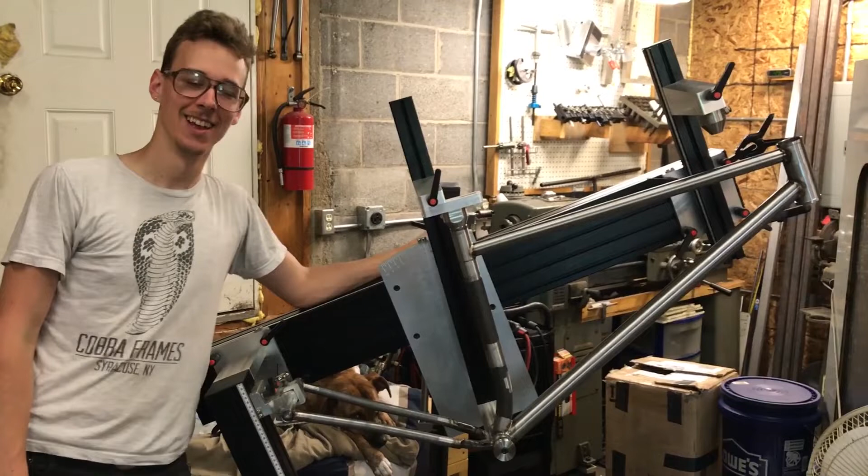My son is becoming a man. This frame is coming close to being done. Look at all the work that we have and how far it's come. I think it's exciting. In this video, we're gonna design and then cut, then bend and miter the seat stays so they're ready for welding. Let's get into it.

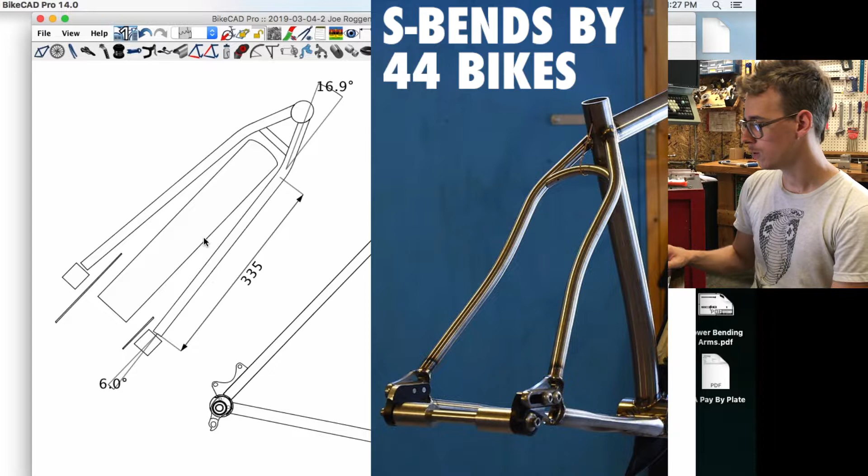That's popular these days, and there's nothing wrong with that, but I've always kind of preferred the look of the single bend rear end anyway. It's more of like a 80s, 90s mountain bike kind of look, and I think it looks good and simple, and that's just kind of what I feel like doing. So with my bender, you could pretty easily do S-bends, and I have a YouTube video about doing S-bends, but in this case I think I just want to do single bends.

And so I have, in the wheel dialog box, the diameter of the wheel and width of the tire, and so that gives me the tire here modeled up, and then I just kind of do the bends around that. In this one I do the number of curves, I do 1, I do the radius and how far I want it to kick off of the center line of the tube, where along the length of the tube I want that. You can do this as a ratio or in millimeters, doesn't really matter.

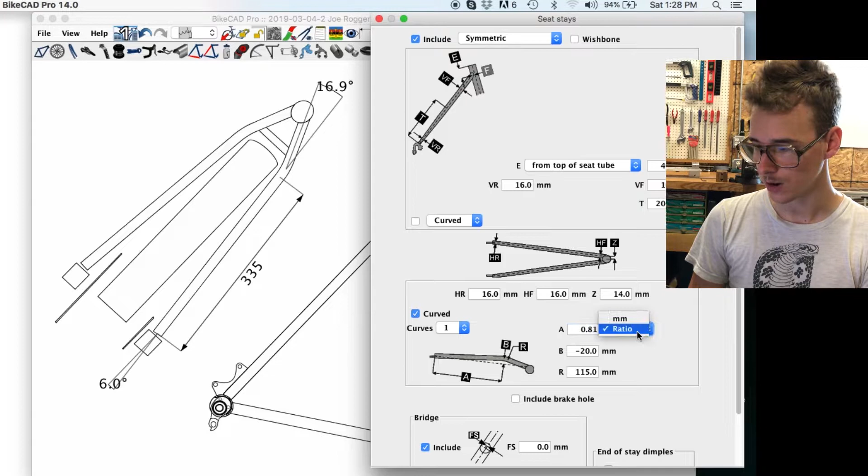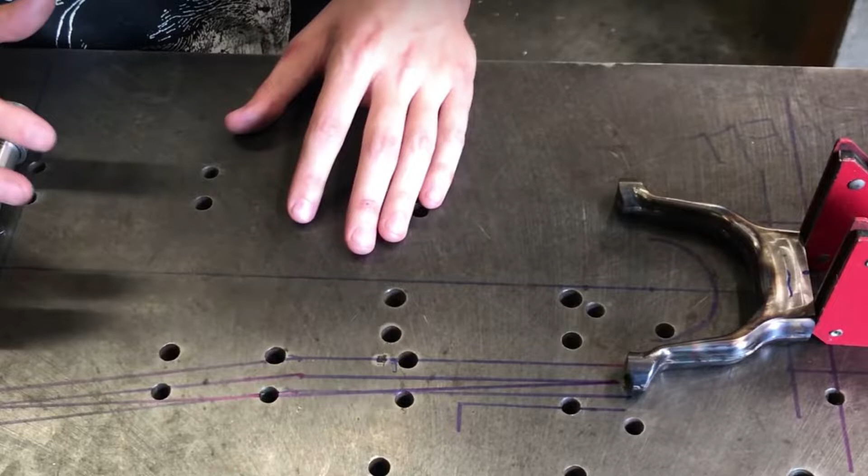And then I use the dimensions dialog box to pull up certain dimensions, and these ones here show me the length from this point on the end of the tube to where the point of tangency is for the start of the bend, the degrees of bend, and then this here also shows me the miter angle against the dropouts. And so that's the information roughly that I need to do these. Whereas in the last video I drew it up with a Sharpie on my table, in this case I'm just using BikeCAD. So different ways to skin a cat.

So we'll go chop the tube and start cutting and bending the tubes. So this is going to become our seat stays. This is 5/8 of an inch or 16 millimeter 4130 chromoly tubing. It's straight gauge tubing. So this isn't designed specifically for bikes. This is just chromoly tubing. I need to cut it roughly to length, and there's different ways to do that. So I could do a measurement in BikeCAD that would show me roughly the length I'm looking for.

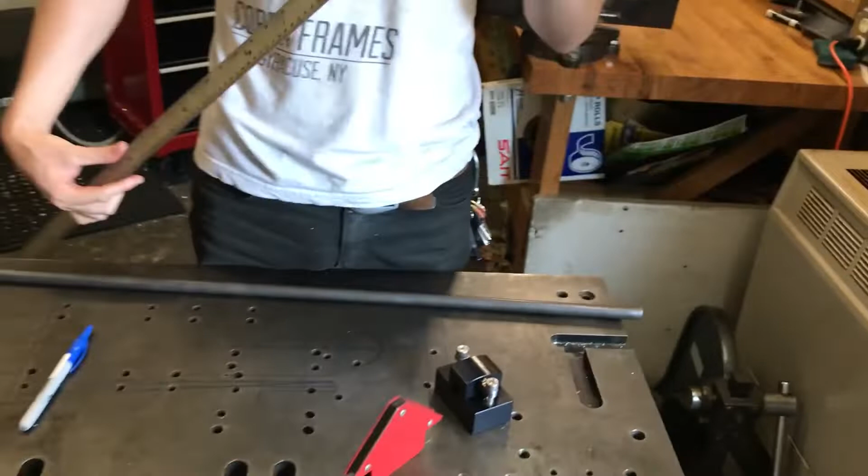Another way to do that is to just walk over here to the frame fixture, and I can say, yep, I want it to be at least this long for a rough cut. That's one way to do it. So I can measure this, or you can just put the ruler on the frame fixture. Pretty obvious. And this is what I had worked out before, was like 480, 485, somewhere in there. So I'll just cut it a little bit long to be safe. Scribble this one out. So I'm going to cut 2 pieces to that length.

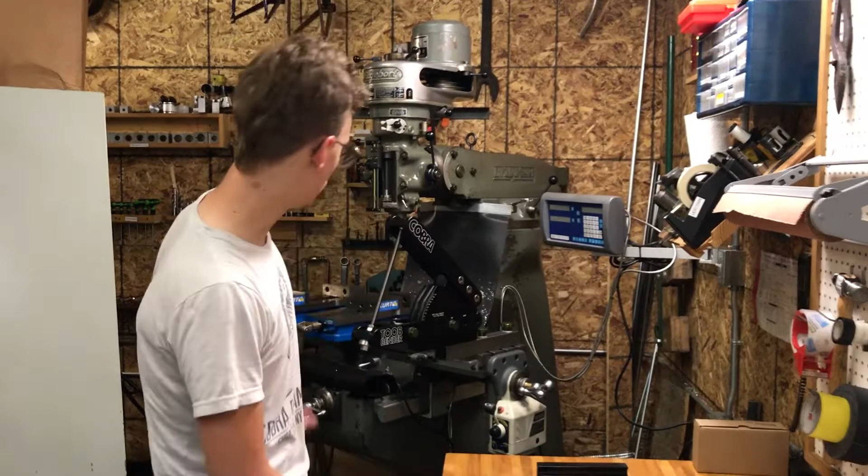So we're about ready to bend these heckin' tubes, and we need to know the degree of bend, and we need to know where along the tube do we do the bend. And so if we look at our beautiful Cobra Frames tube bender, we're going to slide the tubes in a certain amount, and the point of tangency is like right here, where the straight line of the tubes meet the arc of the bending die.

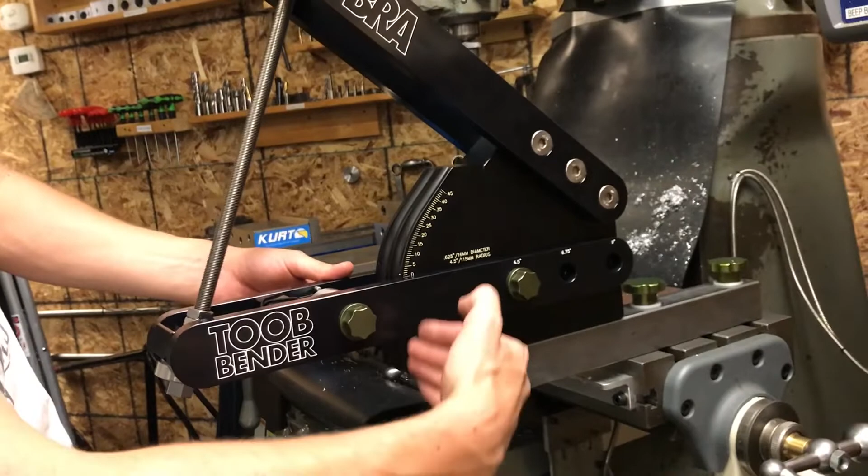And so you can figure out that point of tangency from BikeCAD, and that was my number that I had on screen earlier, and I'm just going to add a little bit because that was from the dropout to the point of tangency, and the tubes are still rough cut, so there's a little bit of extra length on either end. So I added just a little bit of length to that, and now I know how far to stick my tubes in. So I have it marked. The tubes go into this mark.

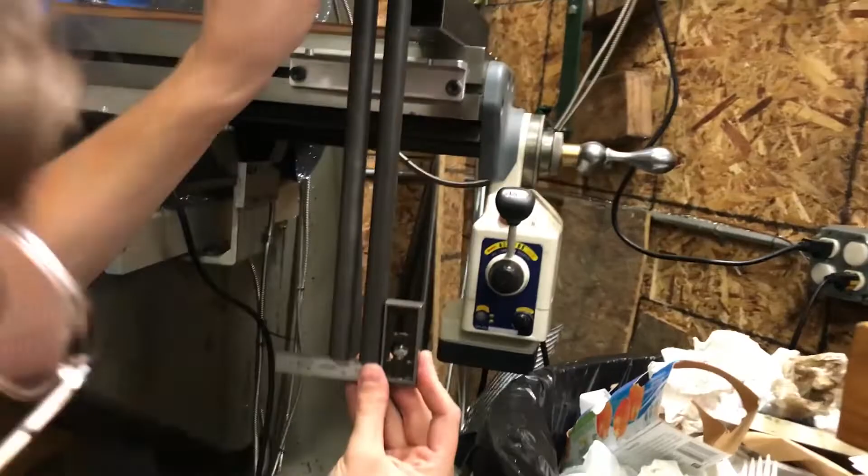I like using this square to square up the ends of the tubes so that they're really the same length projecting out of the tool. So by using this square, I can just really match them up. So the bends, because they're bending together and they're from the same material, I know they're going to get the same degree of bend almost exactly, like so close. It would be nearly impossible to measure the difference in the degree of bend between them, I think. But when you line up the ends, then they start the bend in the same place, and so it's pretty repeatable at that point.

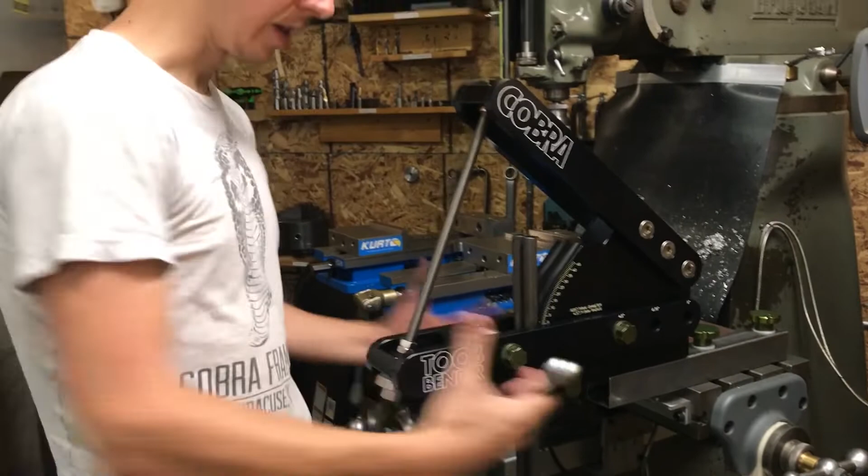So I'm tightening the clamp that holds the tubes. Then I drop in, this is called a follow bar. This cradles the back side of the tube, and if you followed the series, you've seen this a couple times. I'm just going to put a little bit of preload tension on this screw here, and that just keeps it all compressed. And now I'm going to drive the bend.

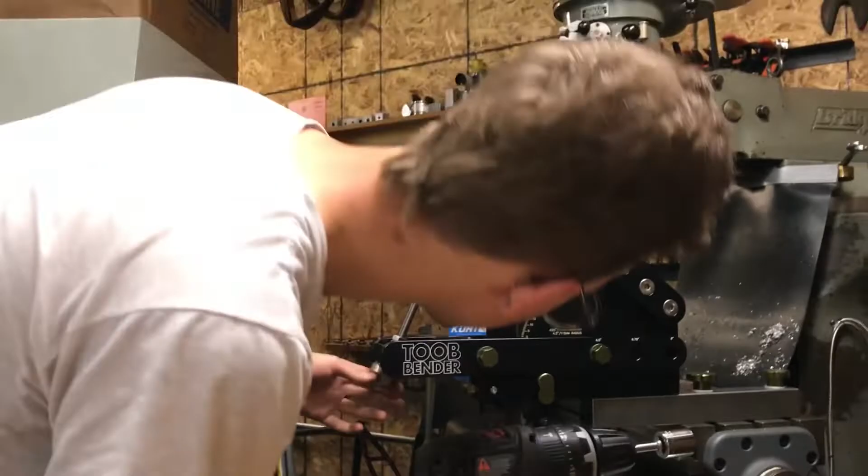So I want to have 17 degrees of bend, and if I just bring this to the 17 degree mark and then release the pressure, it'll spring back a bunch, right? So I want to go over 17 degrees, and I don't know exactly what to do, so I'm going to go to like 25 for starters. We'll see what that looks like. Let's do it.

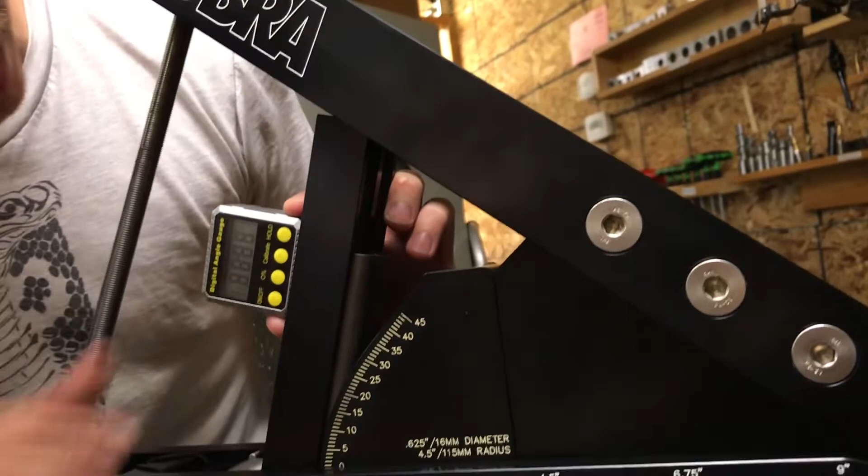So there's all different ways to measure the degree of bend. One of the cool things about this bender is that because the tubes are straight here and then the bend is up here, you can use a level. And so I get this follow bar, so it's pushing against this bent section, and then I can read the angle off of this scale. So when I turn it on, if this is vertical, which it is, then I subtract 90 minus 73, and that gives me 17, which is actually what I'm shooting for.

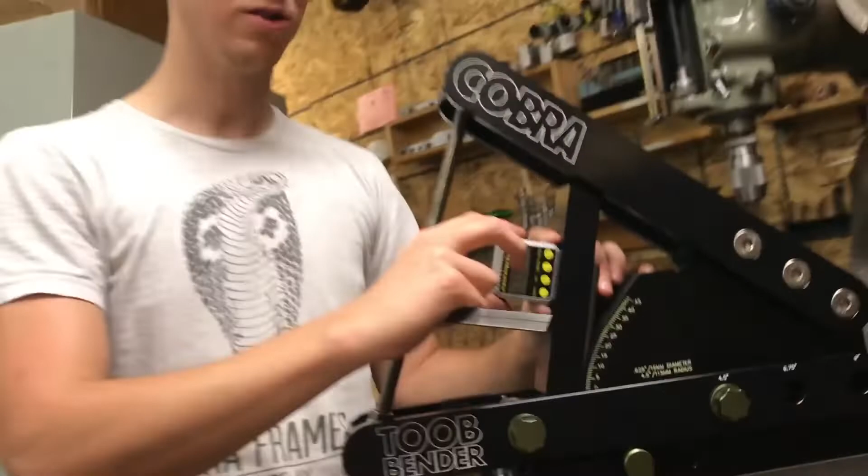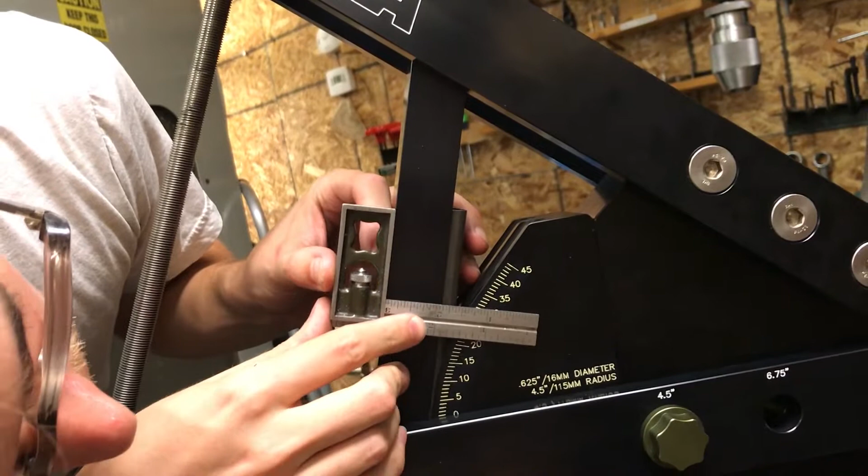And I figured out another way to measure the angle while it's in here, which is pretty nifty, and that's to use a little square like this. So I get this follow bar, so it can't be down here. It needs to be parallel with the tubes. I use the square to sort of project this edge, and then a perpendicular line, which is this. And now I look for when, up here it's not parallel with my degree marks, and down here in the other direction it's not parallel, but at some point it'll become parallel. So it's a little bit sensitive, but you can read the angle like this.

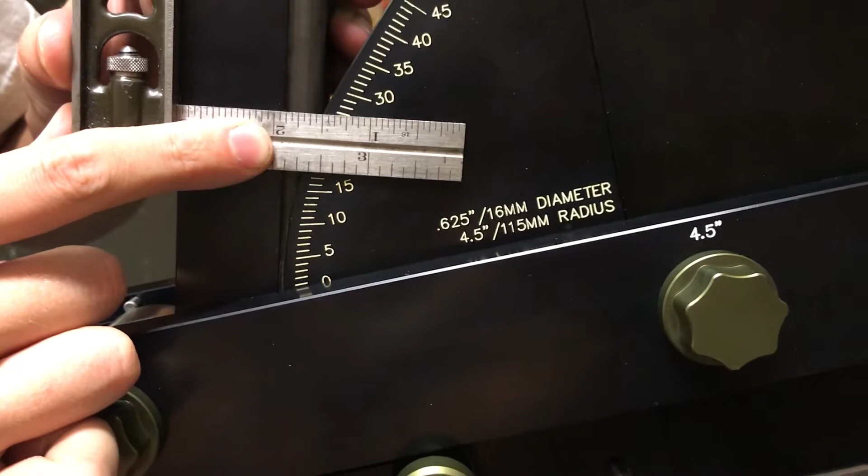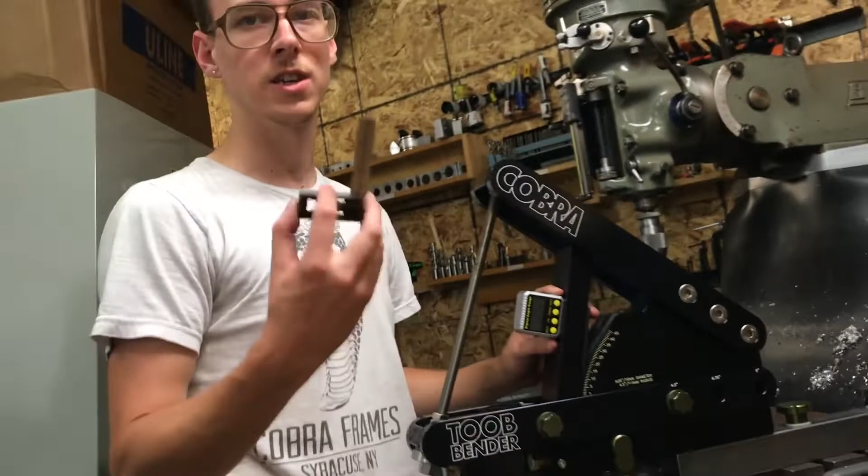So it looks like, according to this method, I would say that I'm at 16 or 17 degrees. It maybe looks a little bit more like 16. And when I use this guy, we had measured, that's more like 17, but you can see you can get pretty close measuring this way. So if you didn't have one of these around, it's just another option. So I'm going to say that we bent it where we needed to bend it. I'm feeling pretty good about that number, and I just take them out of the bender. Those look real nice.

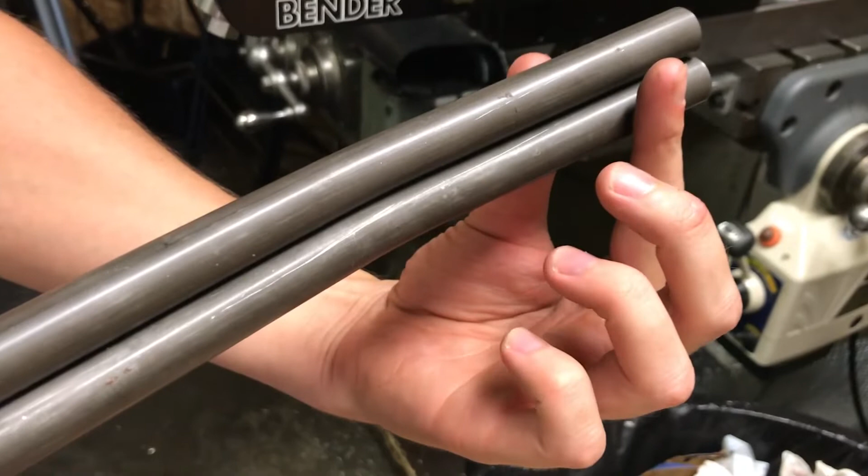So at this wall thickness, 28 thousandths of an inch, this stuff is kind of fussy to bend. If you don't have nice tight-fitting dies, this stuff will ripple on the inside, and sometimes worse. But when it's supported nice in dies like this that are hard and smooth with exactly the right geometry, it just cradles the tube, and it allows you to get a nice smooth bend. When I used to do this stuff on not ideal benders, it was very difficult to get smooth bends, and it was also difficult to get the bends placed exactly where I wanted, get the tubes to match each other.

Everything about it was really difficult. Also, getting it bent to a particular degree of bend, very tricky, and this makes all those steps a lot easier. Being able to design on the computer and then walk over to your tool and quickly make the bends that you want to a known specification, and then move on, it's amazing. I used to not have any of this capability, and it gets me really excited to have this at my fingertips.

So this is a good spot for bending. It's not a good spot for when I need to use the mill. Let's get this thing out of here. We're going to start mitering the seat stays. First, I want to do the dropout end where the seat stay meets the dropout, and that comes in at, I think, a 6-degree angle.

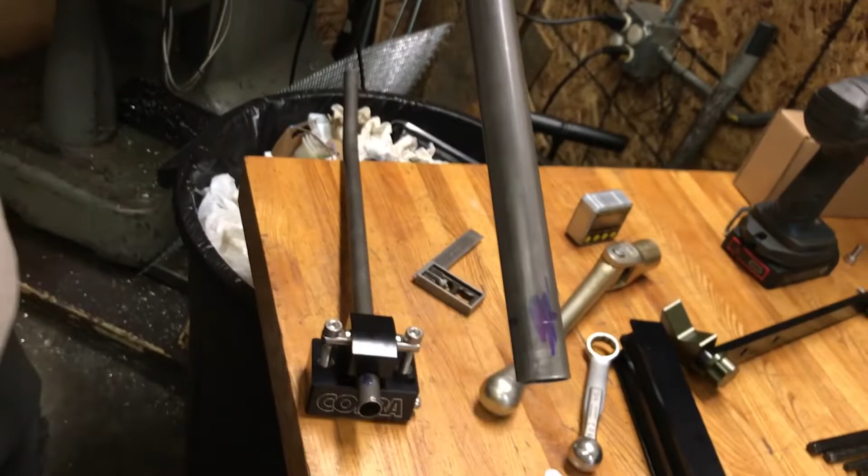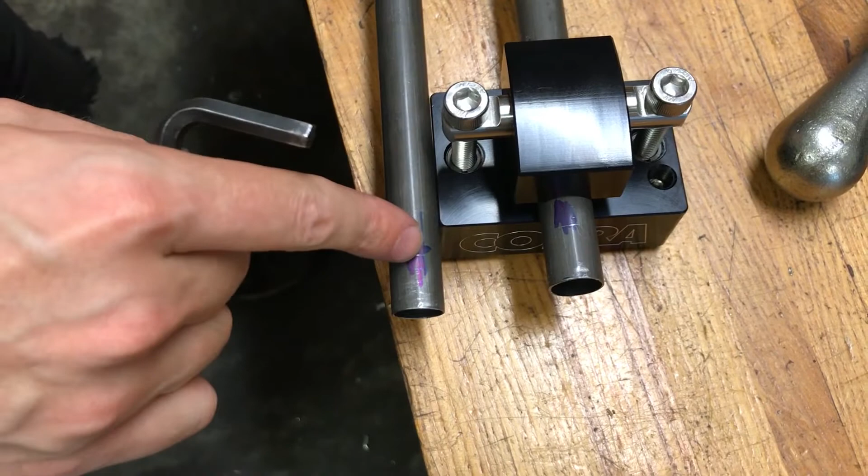And so remember, when I had them on the bender, I flushed up the ends of them with this square. That's helpful now. What I did is I used the Sharpie and then my calipers, and I scribed a line on either one of them. And that way I can cut up to that line when I'm mitering them, and it should make this distance from this line to the point of tangency of the bend the same on both of them, which is great.

And in order to hold them to do that cut, we're going to use the Miter Buddy. This is a tool I released a while ago. I haven't used it yet in this build series. There's some other videos on this channel outlining it. The Miter Buddy is exactly like the Miter Daddy, which we've been using on main tubes. It's very similar in a lot of ways, but this was designed specifically for this application. This holds the dropout end of seat stays, chain stays, and fork blades.

And what this really excels at is, right here we have a straight gauge tube. This is not as hard to hold on to, but a lot of times when you're using bike-specific tubing, it's got a taper as it approaches the dropout. And that is actually very difficult. How do you hold the tube on its taper? It's relatively thin wall stuff. If you just clamp it between parallel jaw faces, you're going to leave crease lines.

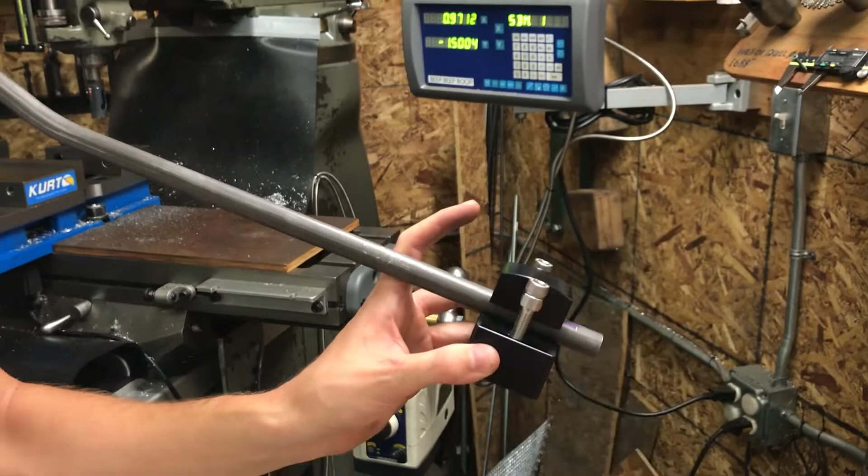If you try and hold it in a normal round tube block, over its length here, it's tapering. So if you clamp it with traditional tube blocks, it's going to pinch on the large side and it's not going to be supported on the small side. And the beauty of this, which is also common to the Miter Daddy, is that this top clamp block can pivot. And so if the tube is coming to a point, this top one just pivots. It distributes the clamping load evenly across the whole thing. You get a nice solid hold. It's also 3 inches wide with parallel faces, and so it goes right in our milling machine vise real easy.

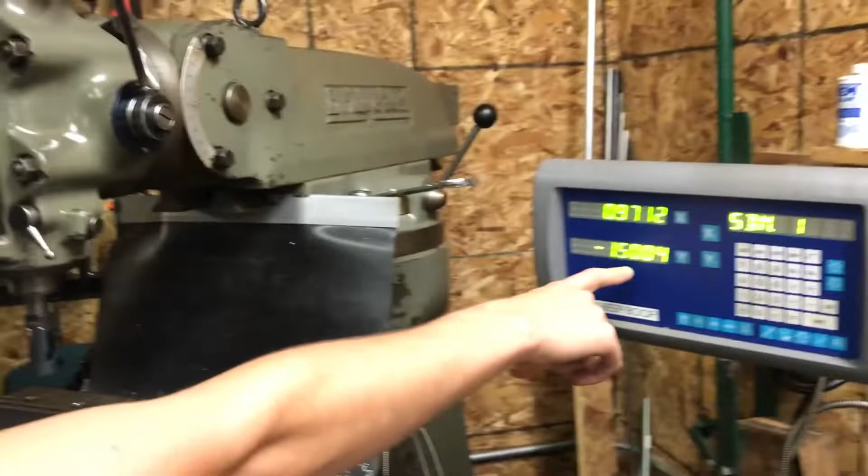So just a second ago off camera, I touched off on this fixed jaw, and then I moved back 1.5 inches. So 1.5 inches puts you right on the center line of the tube. So I just set it in the vise here, tighten up the handle. So now I need to set the angle of the cut. I need to have the tube sticking out of the holder just enough. And then the last thing that I need to do is, because there's this bend in here, I need to phase the tube. So I don't want the bend to be tipped back a little bit.

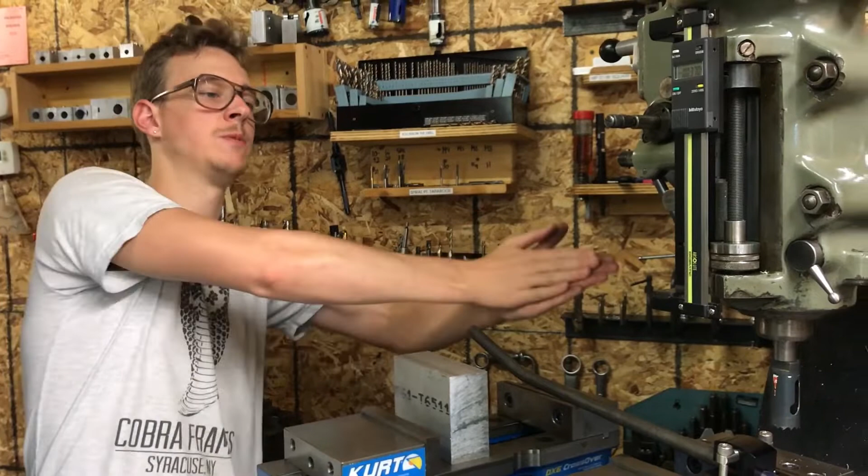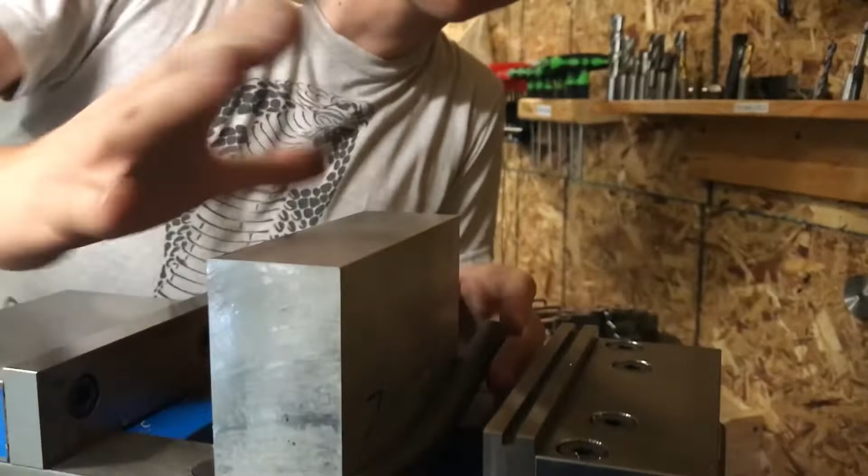And now I do the miter, and I want them to be in line with each other. And so the easiest way that I can think of to do that in this case is, it doesn't matter what the angle of this is yet, so I'm just going to swing it low. And now I have this block that's relatively square, and I can push the face of the block against the tube. I know it's dark back here. I can loosen up the clamp bolts here on the Miter Buddy, and I can twist the tube until it sits flat against this face here.

And when it makes nice broad contact here, then I can tighten these up, and I know that the tube is in plane with this. On the milling machine, you would call this the XZ plane, but you know, with this sort of vertical plane.

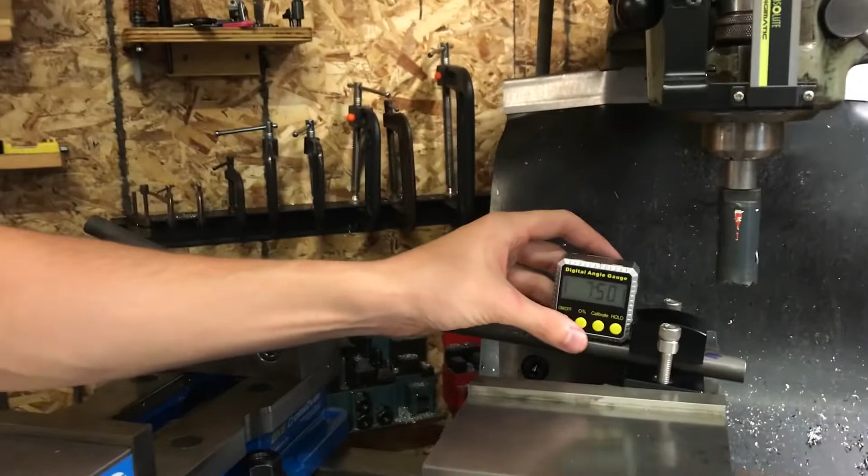So I'm going to set the angle of cut, and my favorite way to do that is with the digital angle gauge. And in this particular setup, usually it doesn't do this so much, but it just keeps wanting to fall off for me today. I don't know if these magnets have gotten weaker or something, but there's a simple solution to that, which is that the tube is straight all the way until here, and you can just put this thing upside down.

And what's great about that is that it actually knows that it's upside down, and it knows that you're probably right side up, and so it displays the digits so that you can still read them. And so this works fine in this case, and I can set the angle this way.

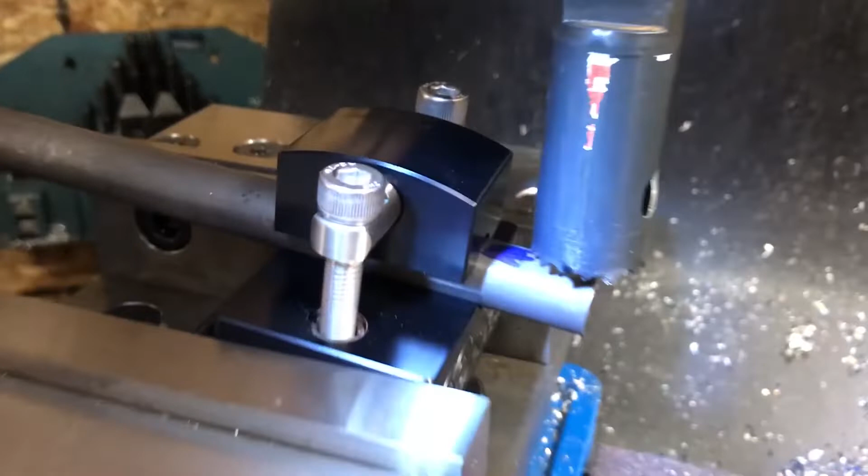So I'm gonna come up to my line here. It's kind of hard to see the line, so I got a flashlight, and I'm gonna turn the spindle on. I'm gonna slowly feed down. And I'm actually going to feed over until I approach my line. You don't really want to cut side to side, but I'm just skimming the top. I think it's okay. I like where it's sitting, and I'm going to make the cut now.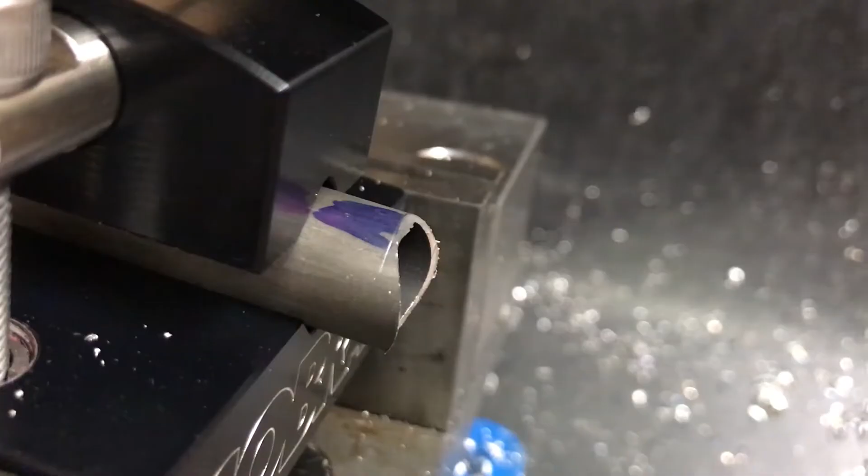One of the coolest things about this is that you can match the angle: as long as you don't release the vise pressure on this, then the angle will stay the same. And so I'm just gonna loosen these, pull the tube out, put in the next tube, phase it again, and then I can make another cut.

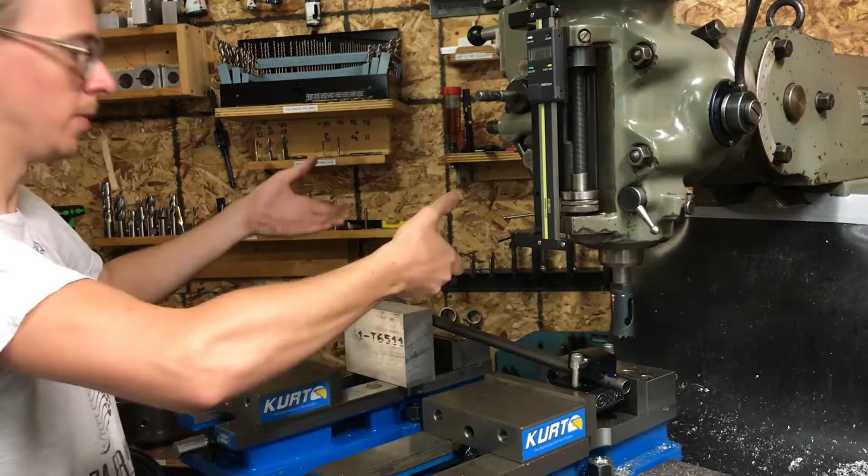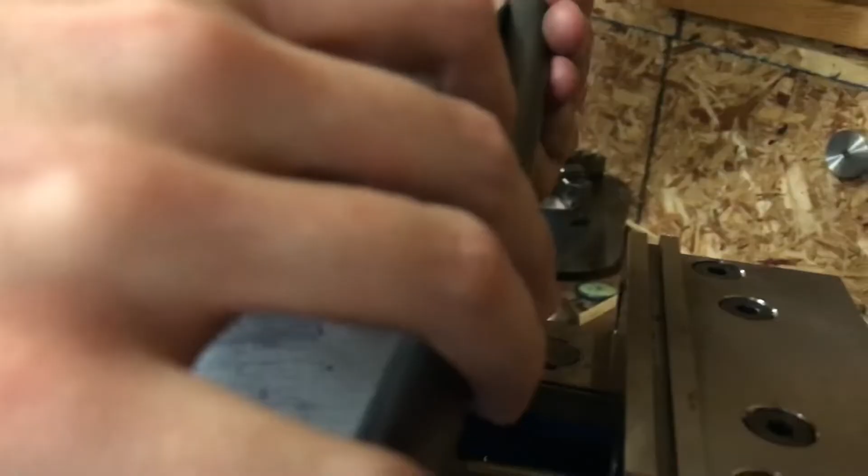So I want to get about the right amount of stick out. I don't want it way out here, and I don't want it choked up where I can't reach it. This is my squaring block. I see now, last time I did this was before I set the angle, so it's sitting up a little bit higher. I don't have as good a contact, but I don't want to change this angle. I'm actually going to lift the block up. These will be a good way to jack this block up a little bit without changing its squareness. I just rotate it until it makes nice broad contact.

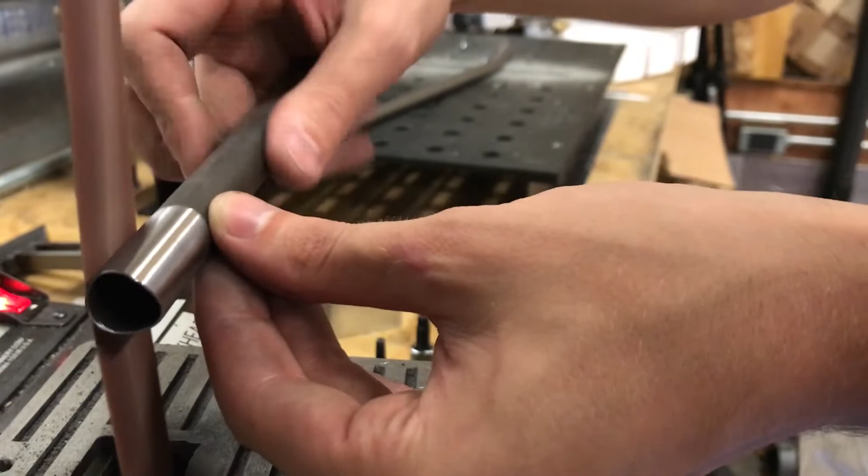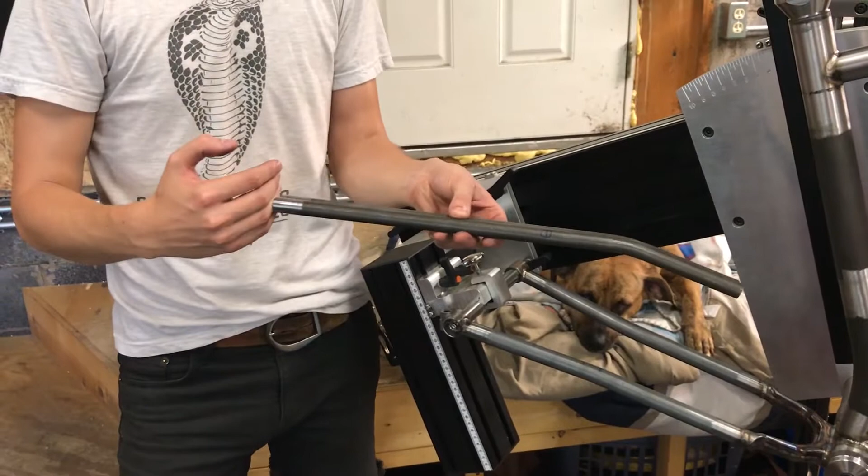So now we have the matched pair. They're roughly the same length. The miters are exactly the same length from the point of tangency, exactly the same angle, and the bends are exactly the same. And so we can set them in here, but of course they're not ready to sit in the frame because there's interference. They're too long. We haven't mitered the other ends, so we can't really test the fit that well yet.

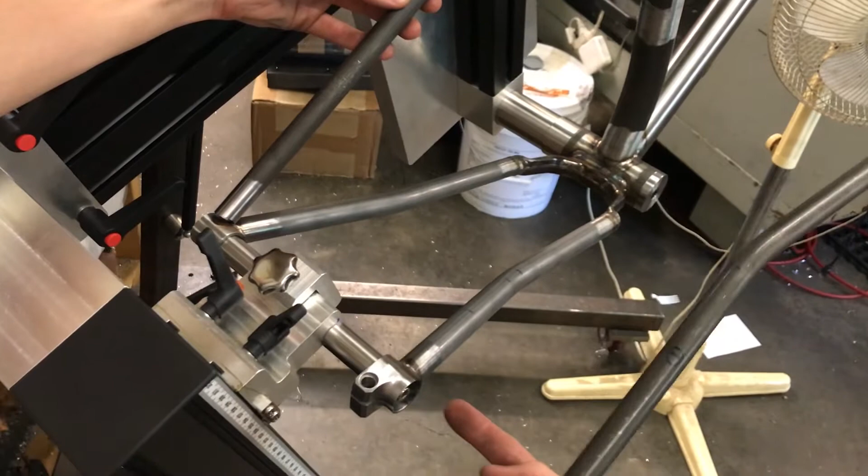They're mitered so that the center line of the tube intersects the center of this dummy axle, like the center of the dropouts. And so to sit at the angle that they need to this way in the frame, there's going to be interference. I'm going to have to grind part of this corner out here where it sits against the chainstay and the weld bead on the chainstay. That's not a big deal, but I haven't done that yet. So you don't see the fit up yet until we do that other clearancing.

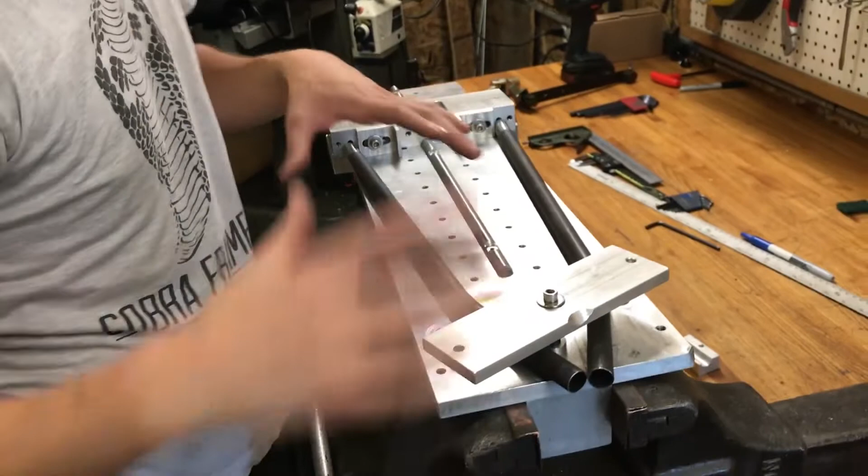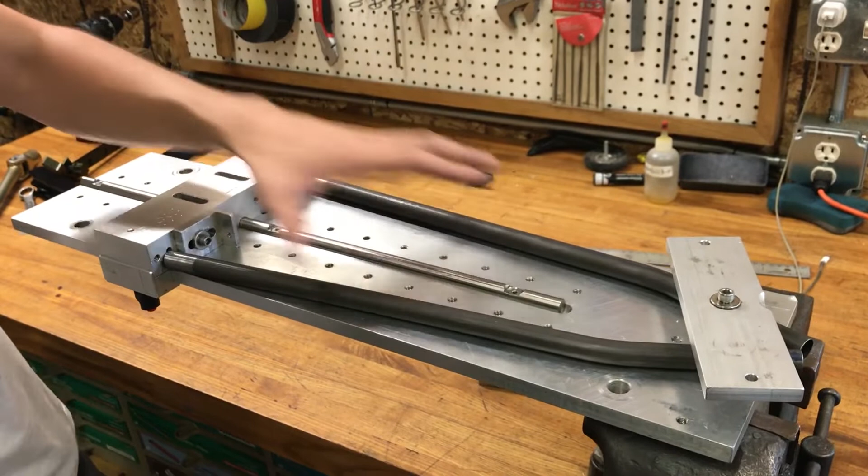So in order to do the seat stay miter where the seat stays intersect the seat tube, I'm gonna use my seat stay mitering fixture. I built this years ago. It was one of the first tools that I built for bike frame building after I got this Bridgeport milling machine. And it was a fun learning project. I learned a lot from making this. It's not perfect, but it's gotten me through projects every time I've gone to use it. And so I've been lazy about building something better, and I never bought anything nicer.

And so what it allows you to do is, here on the rear I have markings for different widths of hubs. I use that as a reference along with a millimeter scale, and I can get these so that they're centered, and this here is like the center line of the fixture.

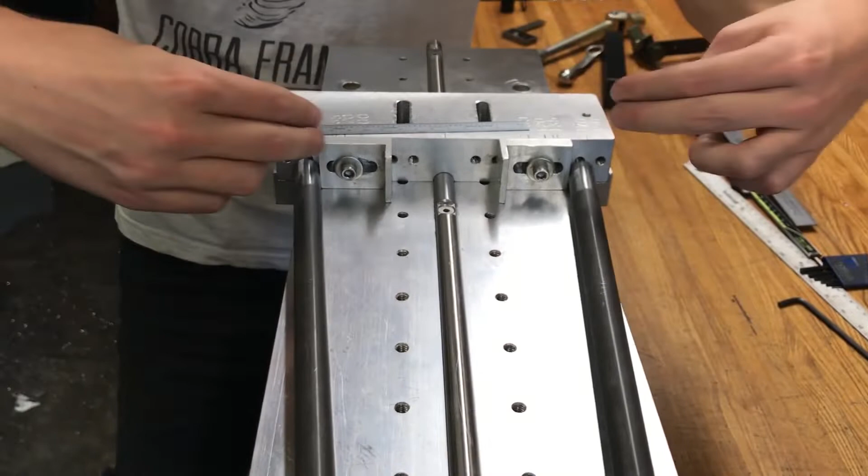So I'll center these little things, and that's just so I can butt up the ends of the tubes, and then the tubes sit against this edge. So really, when you have a cutout like this that's a half round shape, and you're using an end stop like this, you'd really like to have your end stop fit that half round shape at the right height.

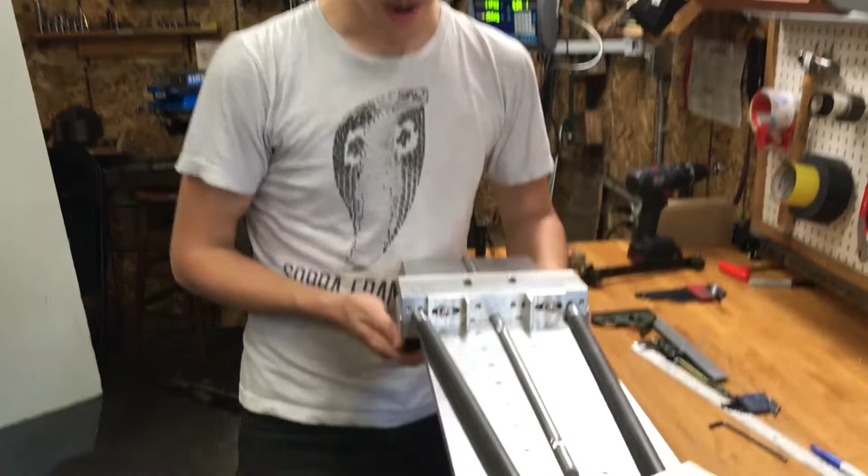It becomes a lot more complicated because every different kind of dropout has a different sort of fit up. So I never bothered making all those, but ideally that's how you do it. This usually gets me pretty close, and it's usually been fine. So anyhow, this whole thing here slides, it's like on a sled or whatever, and so I can slide this part forward and backward when I loosen these clamps on the bottom.

And because of this central rail, it's pretty square. It can't really wiggle more than, I don't know, 5 or so thousandths. I don't think that's quite 10 thousandths of an inch. But anyway, it's not a whole lot. And so that allows you, if you had really short seat stays, you would slide it forward. If you had really long ones, you'd slide it back. And so I want to get to where it makes sense.

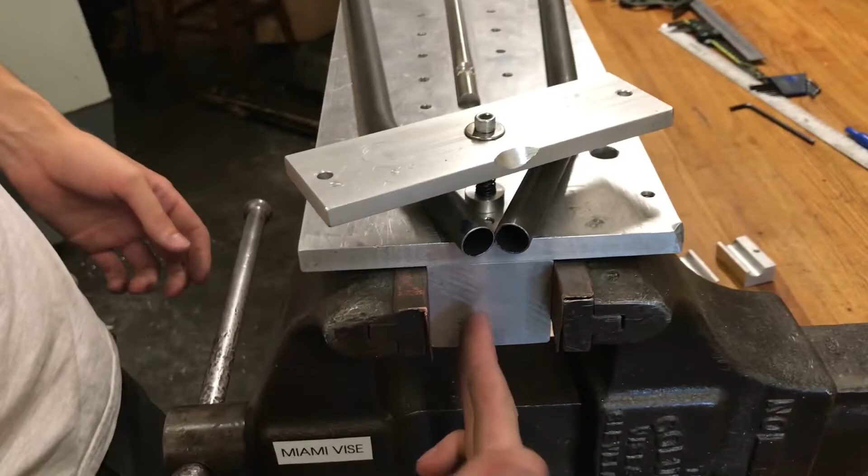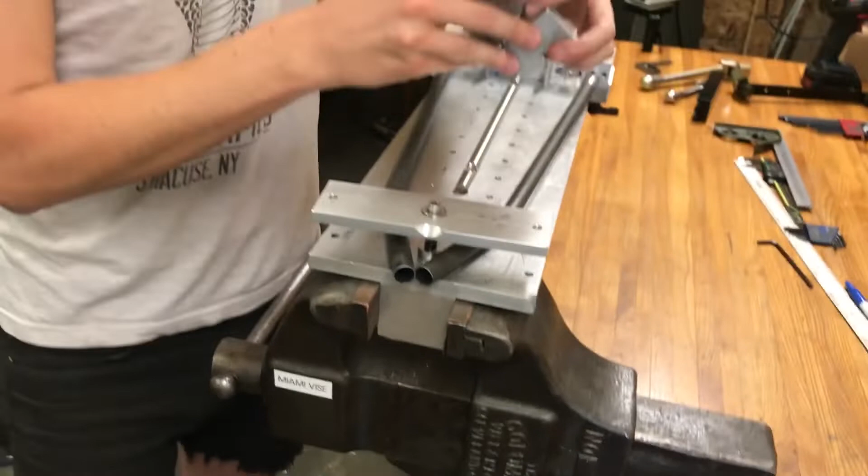It's got this block down here, and I'm going to hold that in my milling machine vise. I'm going to tip the whole thing up at an angle, and I'm going to drive my cutter in, and I'm going to cut both of these at the same time in the same setup. So this here is like a clamping block, and these little tube blocks hold the tubes from above. And so you can see the tubes are not fully cradled in tube blocks. It's really not the most robust setup, but it generally gets the job done if you're slow and careful.

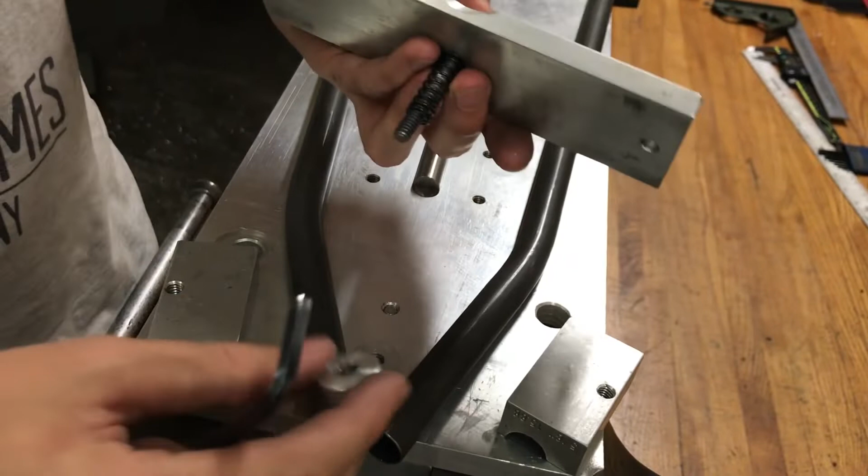And so that's not really the best way to make a tool, but again, I've been a little bit hesitant to build a whole new fixture because usually I can get the job done with this. So here we have a threaded hole, and that's where this goes through, and I have a spring, which is kind of nice, helps support the whole thing. And then I've made a couple of these different custom washers or bushings, and the idea is these are like a centering pilot. So this sets over the hole, and hopefully I have a tight fit against these threads. It's not a great design, but it kind of works.

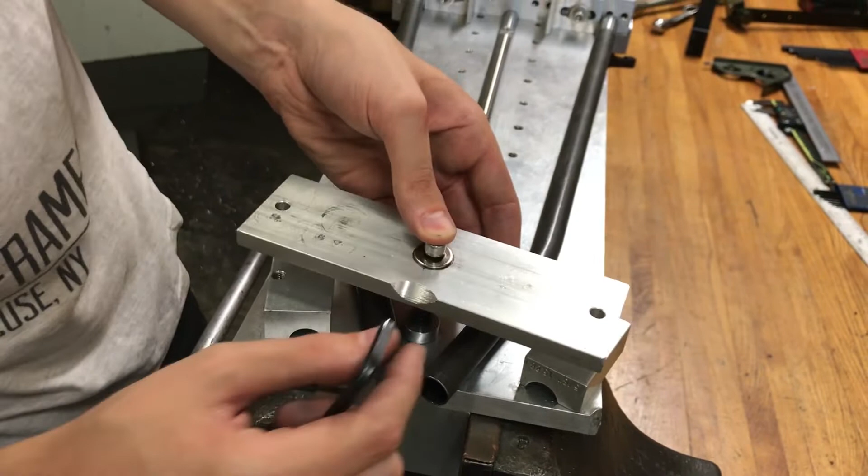And so I thread this in, and now if everything was just right, you would be able to butt both of these tubes up against that little disc, and that would keep them centered on this end, and these, if they were adjusted right, would keep the tubes centered on the other end. And then you just have to get your cutter central to the center line of the tool. And then these would all be symmetrical to each other. And so it's tricky for a number of reasons. One reason is that I don't have like 1,000 of these different washers in different sizes and profiles.

That's one issue. Another issue, and I think this is common to seat stays generally, is that when they're finished, they're going to be mitered so that they fit pretty tight, and they're going to have a cut more or less out of the middle of them. But before they're mitered, they interfere with each other if they have a square cut on the end. So these have square cuts on the end, and if you were to lay them out in space at the same time, so they had the relationship to each other that you wanted when you were finished, they would interfere.

So in order to fit them both in at the same time, you need to cut some of that interference material away. Then you can load them in the tool, and then you can make your actual cut. You make a rough cut to get that extra material out of the way. And you've got to be careful, because if you overshoot your rough cut, then you've screwed the whole operation. So I've seen some people actually do cuts one at a time, and then it doesn't matter so much about getting the rough cut where you want it.

And so I need to think my way through how I want to go about this cut to make sure that I don't foobar it. You know, this is the only 5/8 tubing, I think, that I have around that'll do this task for me, so I don't want to cut it wrong.

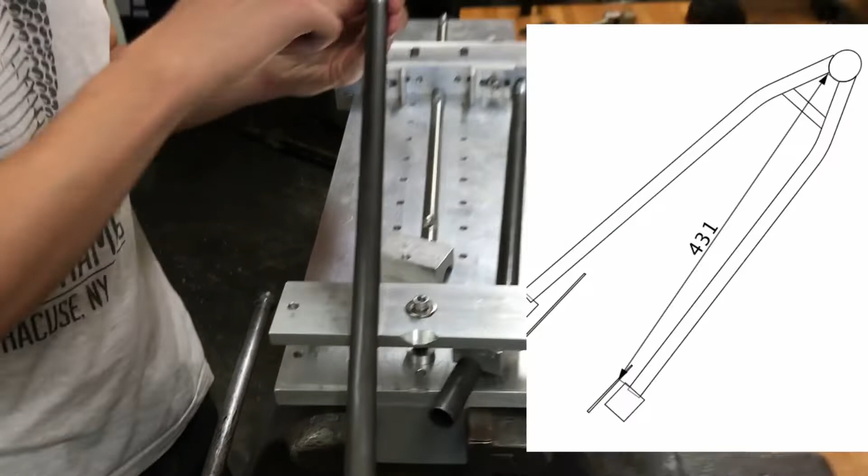And this line represents sort of what the finished miter is going to look like. It's going to be kind of a swoopy doopy cut, but that's sort of the angle of the cut roughly. And so the way that I derived that is I measured in BikeCAD from this edge to this edge, and I also measured from this edge to this edge, or you know, those points, point to point.

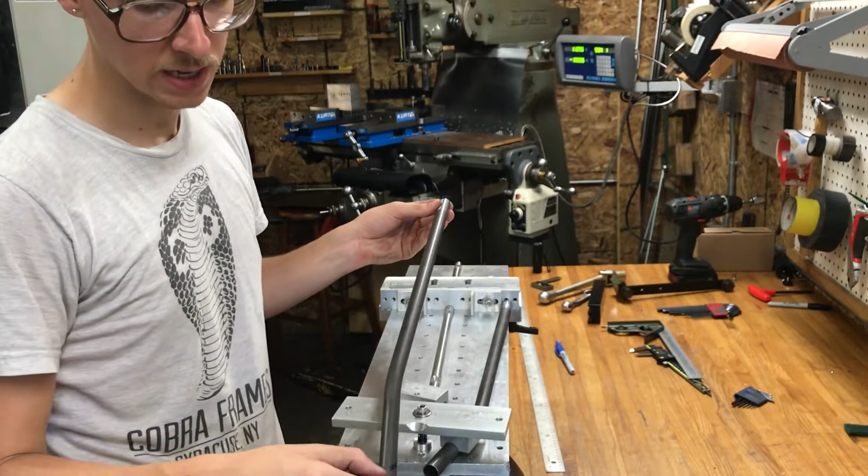So I dotted those on here, so I know that when the tube is finished being mitered, that is where the edge of the miter is going to sit along the center line of the tube, right there and then right there. So it's not actually cut straight, but that gives me an idea of where I could rough cut it to.

So that helps. I just pulled those numbers straight out of BikeCAD. That's one of the really useful things about BikeCAD and the auxiliary stay view. And if you did a 3D model in more powerful 3D modeling software, you could pull out even more numbers probably, but those are pretty helpful to get you off to the races.

And so if I do a rough cut that's a little bit longer than those, that'll leave me a lot more clearance here to get these closer together. And then there's some other measurements that I could take to help me continue to set this up.

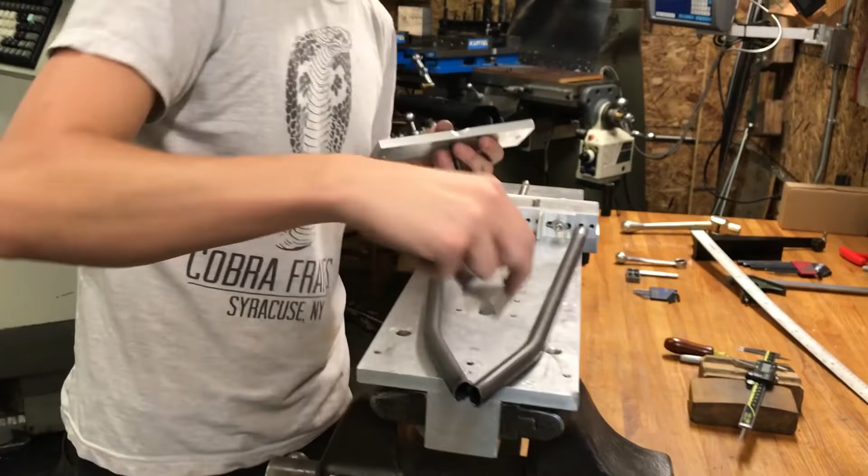So I used BikeCAD to spatially lay things out a little bit more, take a couple measurements, and I decided that I needed to make this disc to a particular thickness so that it would reach the center line of the tubes without interfering with my clamps that come in, these clamp blocks. So I got it to the right height, and then I needed it to be of a particular diameter so that it would space the stays apart.

And now for fine tuning, I can slide this end a little bit, you know, longer or shorter. And as this is a fixed point here, this disc, then the tubes become relatively wider or narrower out here. So I have a little bit of fine tuning, and I knew I needed this to be about 50 millimeters in diameter. Someday I'll design a better seat stay fixture.

So the outside, you know, miter to miter distance on this tube in a straight line, I think was 451. So I marked it from the crotch of this cut, and this blue mark here is pretty much the length that I want it to be. And along the center line of the tube, it'll be the longest on this outside center line. So 1.375 is the diameter of the tube that it's mitering against.

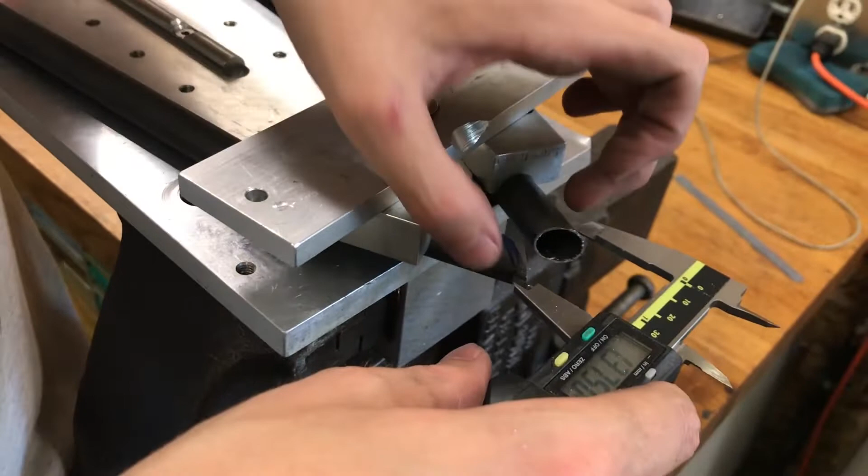And so basically, at that blue line, these are spaced apart at the width that I want. And so that looks good to me. I'm happy about that. And I can set it up on the machine.

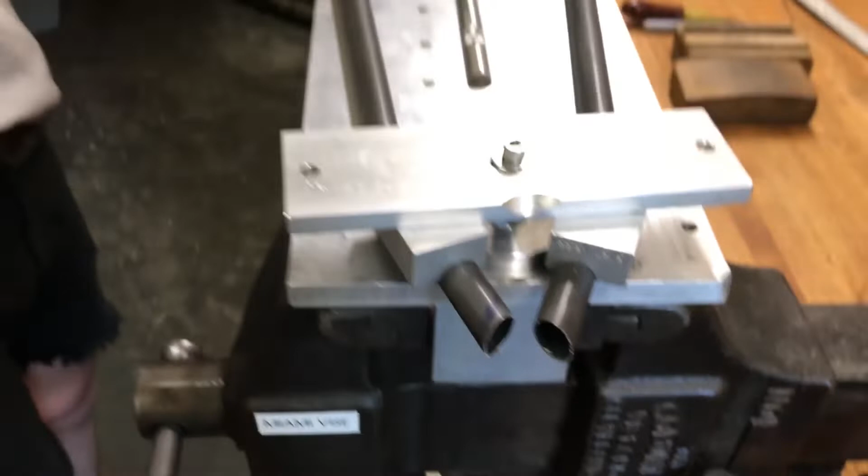So this whole fixture is really not that robust. The tubes aren't held very well, and this isn't that much better, but I think it's gonna make a difference. I'm just gonna put this extra clamp bar across here, and it'll support the tubes a little bit better, so they're less likely to pivot around this one point that they're grabbed. But really, you wanna support tubes with tube blocks or V blocks, and not just pinch them flat against flat. This isn't ideal, so I'm gonna have to take light cuts and have my fingers crossed.

So the way this tool works is with these references, you can get the tubes symmetrical around the center line of the tool. And then you need to set it up, and you need to put it at the right angle. So I use my digital angle gauge to get it at the correct angle. And now I need to get on the center line of these tubes. And the way that I'm going to pick that up is I'm going to use my edge finder.

But these edges are angled, right? The tubes are angled. And so what I'm going to do is I'm going to actually run the spindle in forward as I touch against this side, lift up, come over, and then I'm going to run the spindle in reverse as I run against this side.

I don't know if that still does enough to cancel it out, but the way this works is the friction of the tip against the body of it is what lets you know when you're touching, and then it pushes off. Anyway, I think if you ran the spindle in the same direction in both ways, it might be a little asymmetrical in the way that it represents whether or not you're touching the tube. So I feed up.

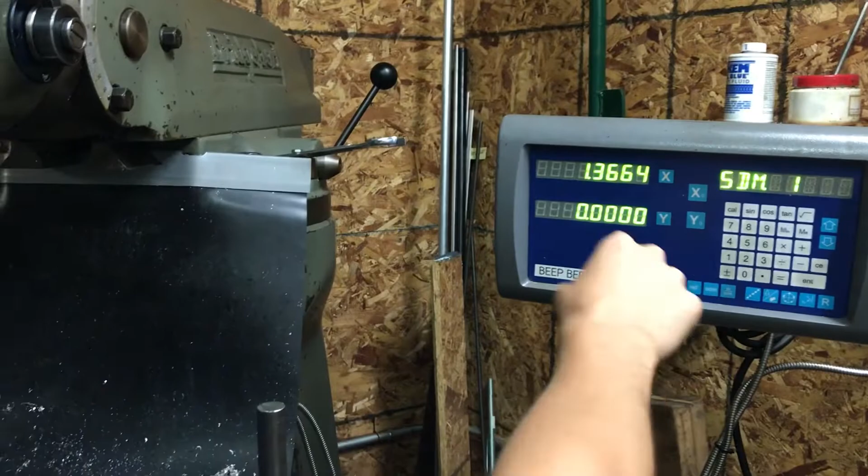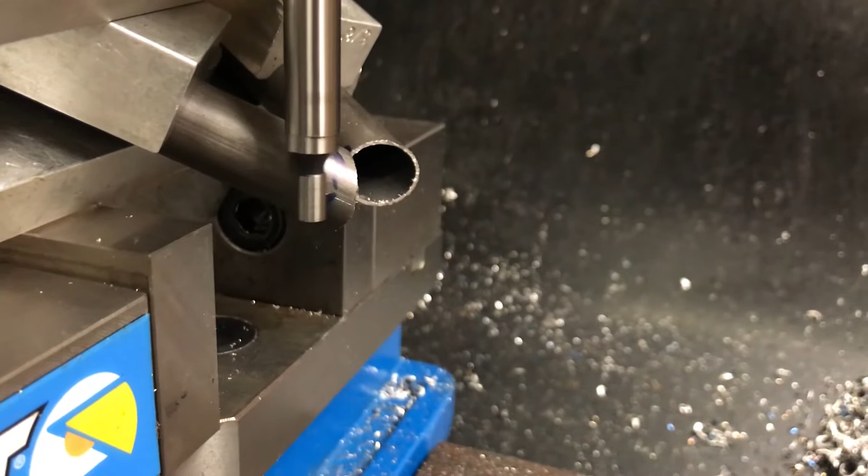So I'm going to zero on the y-axis. Now without moving the x-axis, I'm going to come across. Now I'm spinning in the other direction. So this way, the little tip of the edge finder isn't climbing up in one direction and then rolling down in the other direction. That might make a little bit of a difference, I'm not sure.

So the way that I've done these cuts before, it's not incredibly fussy on your total length. If you got it like a millimeter or so short, the seat stays would kind of sit lower on the seat tube, and if it was a little bit long, they'd sit a little bit higher on the seat tube.

And there's some latitude for it to sit higher or lower. As you get extreme, it would change the angle that they meet, and then your miter angle would be wrong. And so I want to make it fit the print, but it's not incredibly fussy.

And so this blue line here is roughly where I want the outside diameter of this cutter to intersect against the tube. I think I'm about there. I'm going to use a square to check it, and then I'll make my first cut just a little bit long.

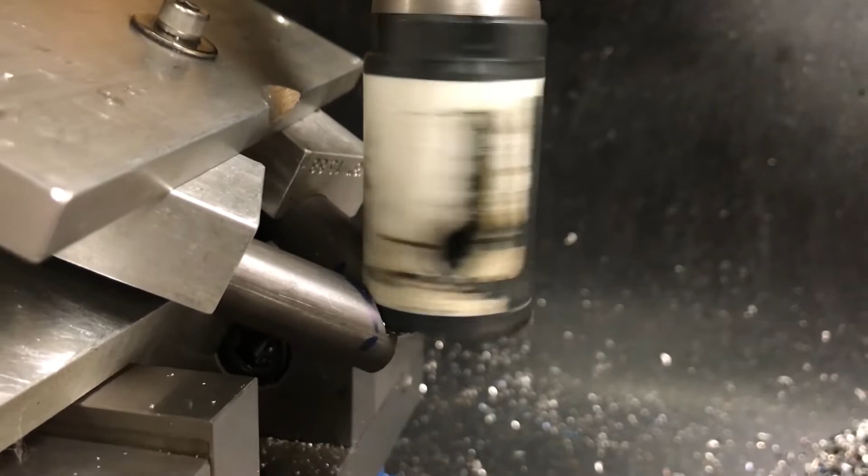This is about where I figured it needed to come to, so you can see we're a couple millimeters long, which is great. We didn't get a full cleanup right in here, so I'm gonna move the cutter over some and take another cut.

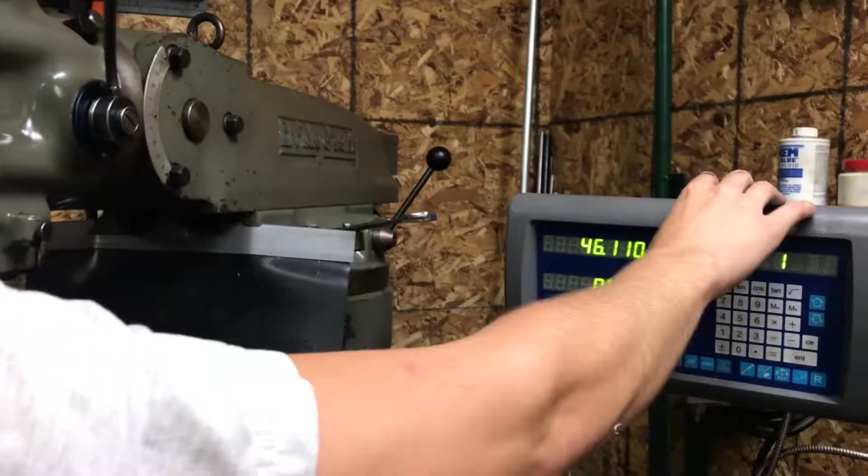I think I would like to take another cut, but now that I have the angle set and I have this backstop and I have this disc here, it's kind of positively locating the tubes, and I can loosen this and I can get rid of this clamp. I can kind of dry fit it on the bike, more or less, and see where it's at, and then put it back in and take another cut. And it won't be that hard to set up the same way again, so I think I will take them out and check just to be careful.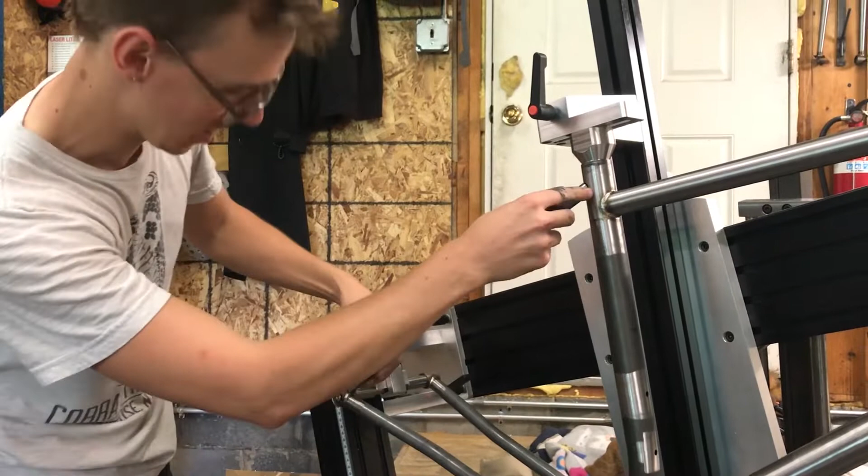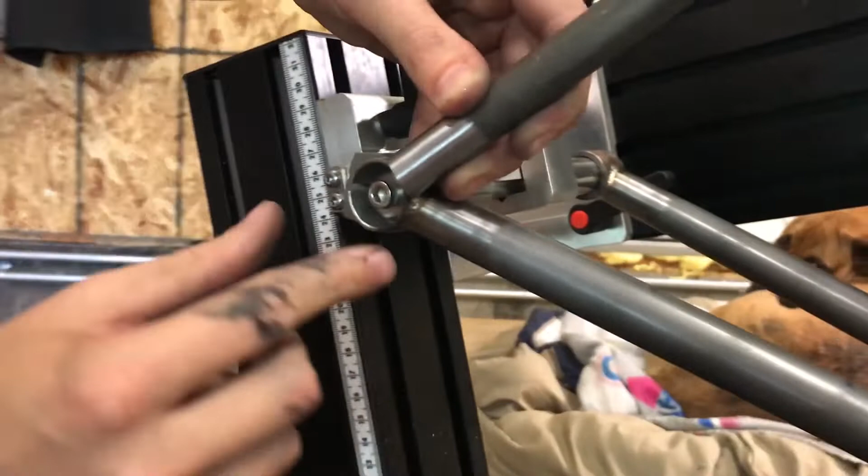So, our stay, it won't fit because there's this clearancing I need to do here. But you can tell we're close. We're in the ballpark. I can kind of set it off to the side here, and I can kind of push it up here. And so when I slide it in further and it gets to here, that'll lift this up some.

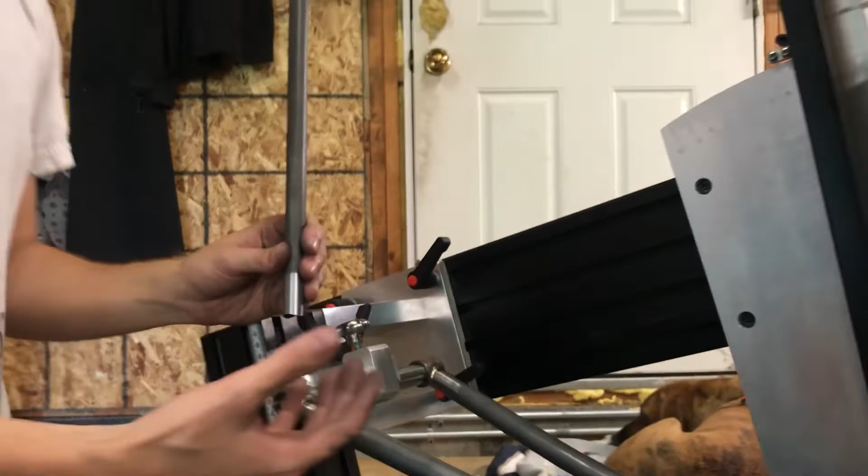I guess maybe before I put it back in the seat stay mitering fixture, I should get the Dremel or a hand file or something, and it'll take me a minute. I want to relieve material here so that they'll fit without a clearance issue, and I also don't want to remove too much because that'll make it really hard to weld without burning a big hole there. This has got a lot of mass to it, and this doesn't have much at all, so if there's a gap, it's going to be hard to weld.

But yeah, I think that's the next step, is relieving the material here to make it fit. So if you look at the material we need to remove, a lot of it is just for this tube here, and it's a round shape, and it's coming in at a particular angle, and it's a lot like where we needed to fit up over here. We had to fit this secondary miter on this tube to the seat tube, and so I'm going to use something with a round profile to cut that shape.

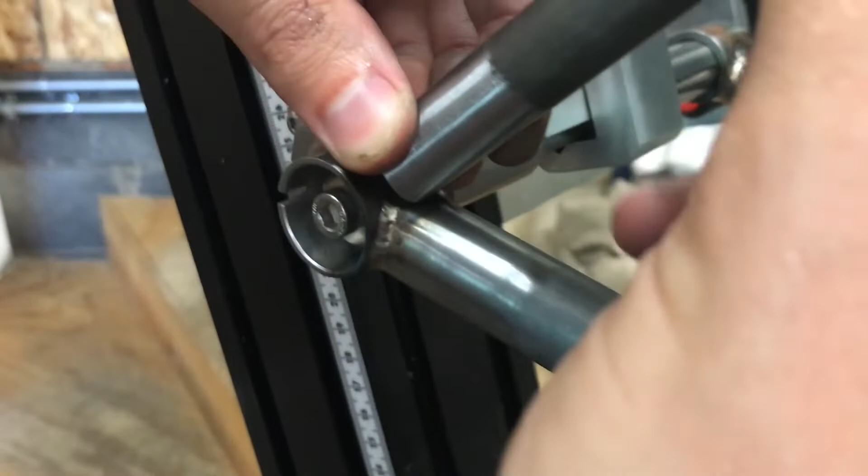I'm going to try something a little crazy here. I've never done this before, but the other tube comes in at about this angle with a round shape. There's a round shape up here. This is way bigger in diameter. I'm just going to kind of rough it back a little bit, trying to use the top of this wheel.

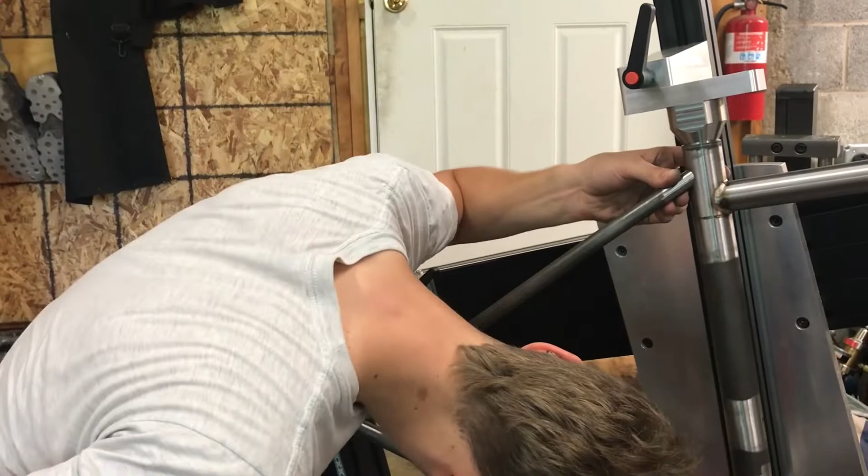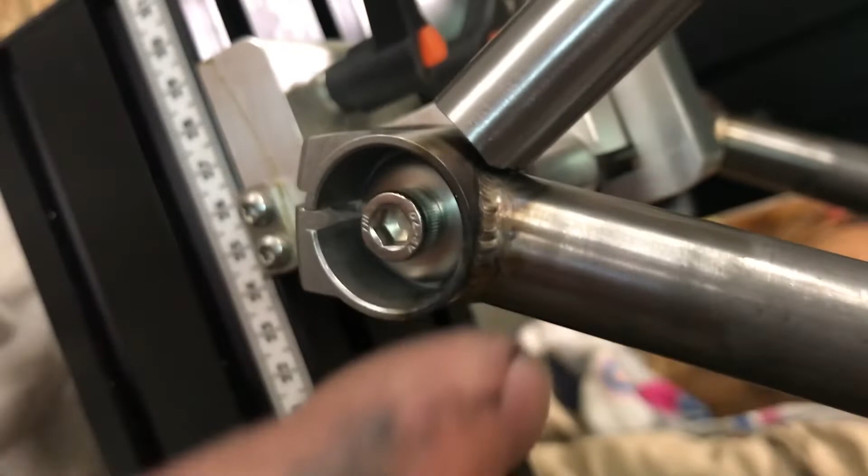You can see when you get in there that I'm on the right track, but I need to be careful to get it right. You know, I don't want to be sloppy about this. Looks like I should move that cutting action more to this side of the tube, and you know, just keep at it slow and steady.

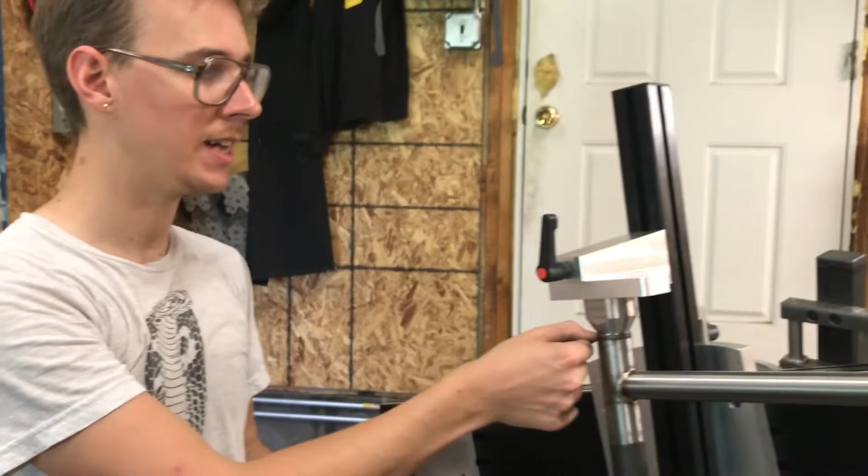God damn, getting pretty close. So absolutely I'm on the right track. I just need to stay careful to not totally botch this. And one thing I want to measure is from the top edge down to the top of where it intersects here. I want to measure where I'm at already, because the question is, after I finish this fit up, do I need to cut a little bit more off on the Bridgeport or not? So it looks like it's about 31 millimeters from the top is how it's modeled.

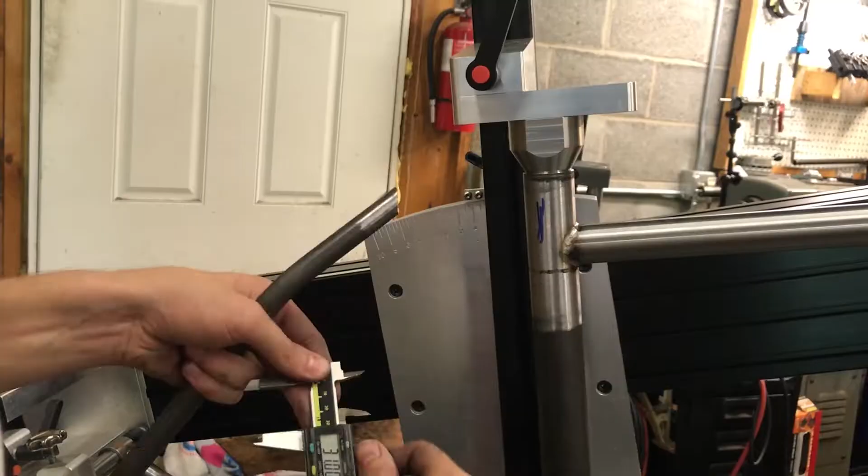It will sit a little bit lower after I have it fitting tight here. I think I'm just going to work on fitting these in, and I'll assume that it's probably close enough. I'll do a double check right at the end before it's ready for welding. What I'm really getting at here is that the cut we were doing on the Bridgeport as we brought the cutter down here on the end, if you were to cut that too short and you lay the tube in, it wouldn't sit here. It would end up fitting lower on the tube, right?

And so this is one way that I can measure whether or not the way that I cut this tube on the Bridgeport for length meets the design. It's just to see where does it sit, and then also to confirm that the angle was good, that there's no huge gap on the bottom or huge gap on the top, but that it's got a nice tight fit. And as of right now, it has a great fit, and I'm only going to dress the end of this so it should have basically the same angular relationship after I do that. So I'm pretty happy with the angle of cut, and I think the length of cut is acceptable because of where it's sitting on here height-wise.

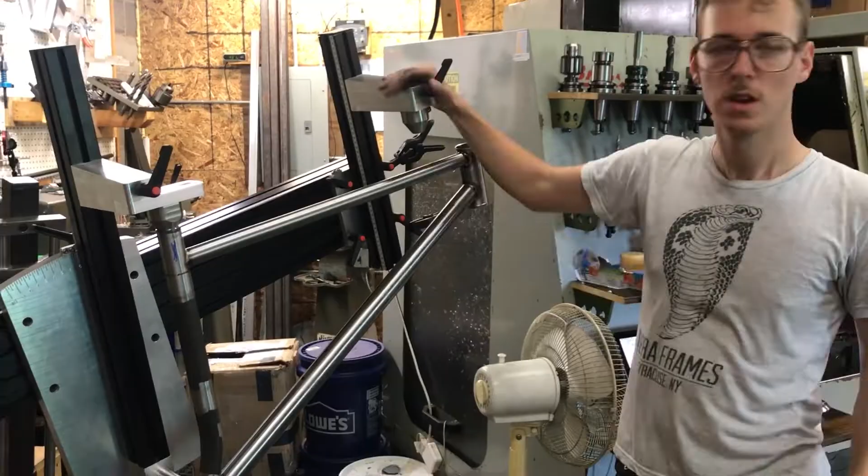So it's just kind of fussy work going back and forth, guess and check with the fit. And I don't feel like doing that on camera, but you understand the idea. You just check to see if it fits, you look where it's interfering, and then you grind a little bit more off. After I do that, I'm going to do the Sharpie mark around the tube, so that I have a template for where to drill my vent holes. I'll drill a vent hole on this side and on this side, so those stays, the gases on the inside can pass freely into the seat tube.

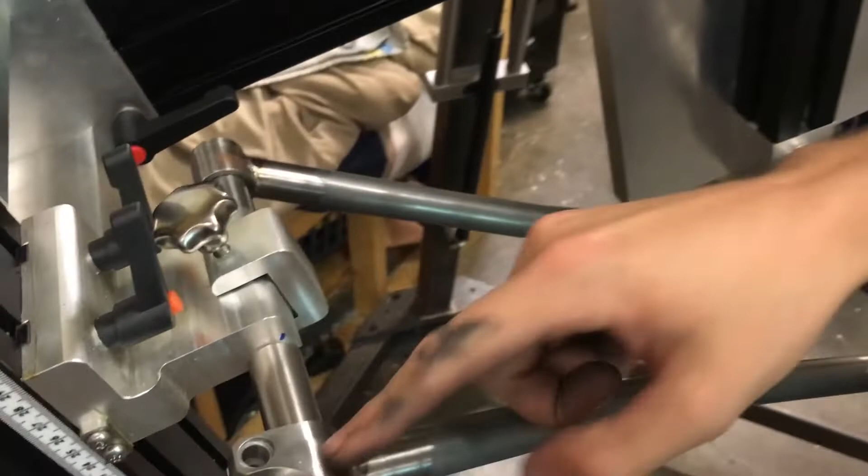And the same thing, I'll drill a little hole here and here on the dropouts, so that gases can, and it's for the gases during welding and in the life of the bike. You know, condensation works its way into the bike frame whether you like it or not, and that it can drain out and that the air can exchange. You're not stuck with moist air inside of your frame is good when you're building with steel. And then it'll be just shine up the metal, clean things up, and it'll be ready for welding.